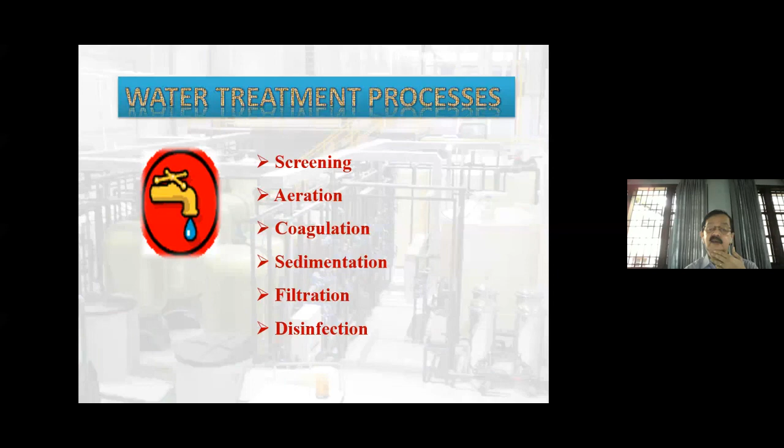Screening is nothing but using a screen with a small mesh size so that larger particles cannot pass through, simply screening turbid or impure water that has a lot of other particles. Aeration means passing air through the water, which purifies it by oxidizing many compounds, especially organic compounds, and iron.

Iron especially is removed by aeration, because dissolved iron is converted to the ferric form, which is not soluble in water and is precipitated. These things can be removed by aeration. It also promotes good bacteria growth, which helps purify the water.

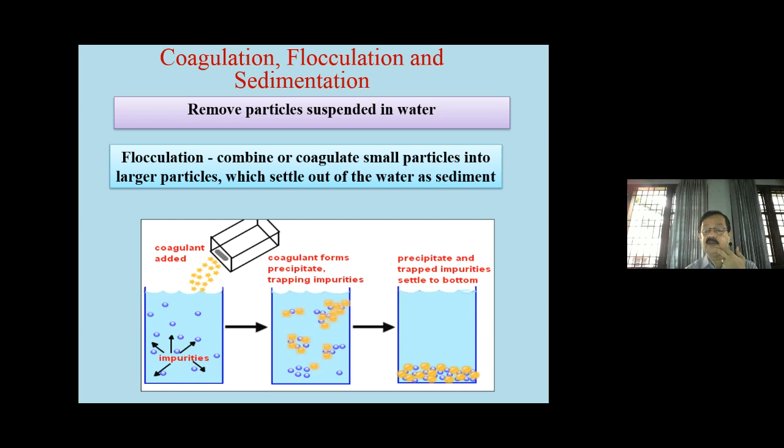Sedimentation, which includes the removal of particles by flocculation, lets us remove the sediment particles. There are so many instances where the water has a lot of impurities. Then we add certain coagulants, and that will trap the impurities; ultimately it will precipitate out, trapping the impurities, and settle to the bottom. That is what is happening.

If you put this powder in a vessel which has high turbidity, you can see that after some time the turbid particles will settle down. Then you can decant the water or filter the water through certain filter media, and then you can use the water. There are so many instances where people put this aluminum sulfate into a turbid water body, and after that sometimes the whole water gets cleared. So these are very good coagulants, and several industries are also using this type of flocculants.

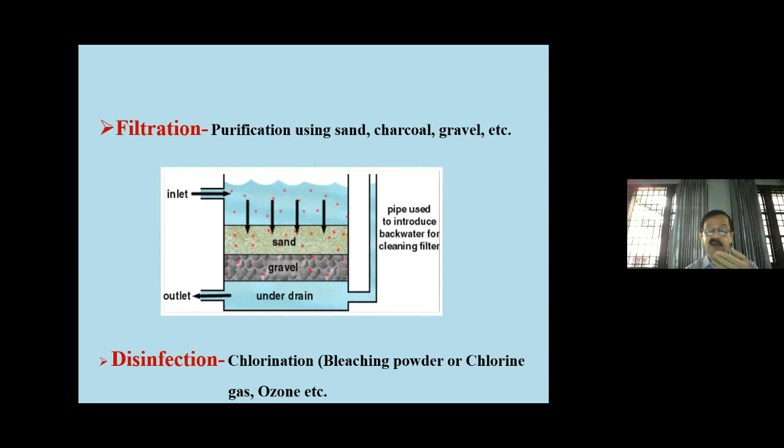Filtration is purification using sand, charcoal, gravel, etc. We pack these types of materials as a filter media, and if you pass the water through this type of filter media, ultimately the water gets purified. Coming to disinfection, I will come to that later. And this is a general treatment method which is practiced in a water treatment plant.

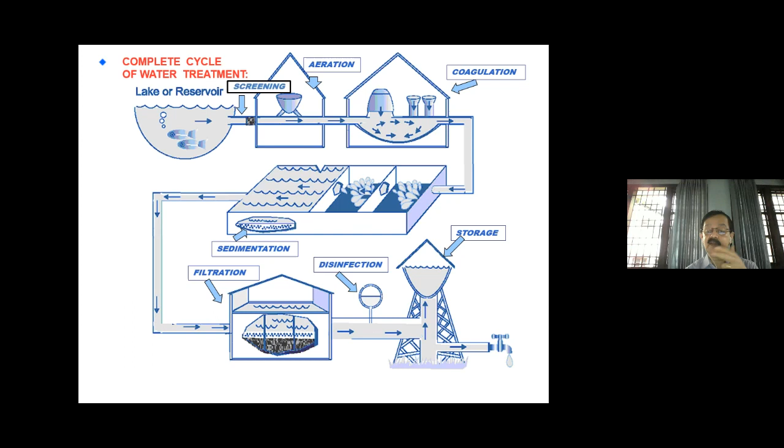and finally disinfection takes place using chlorine dioxide or chlorine gas, or even bleaching powder is added. Ultimately it will be treated, and we store it in some type of storage devices, and from there it is supplied to the public.

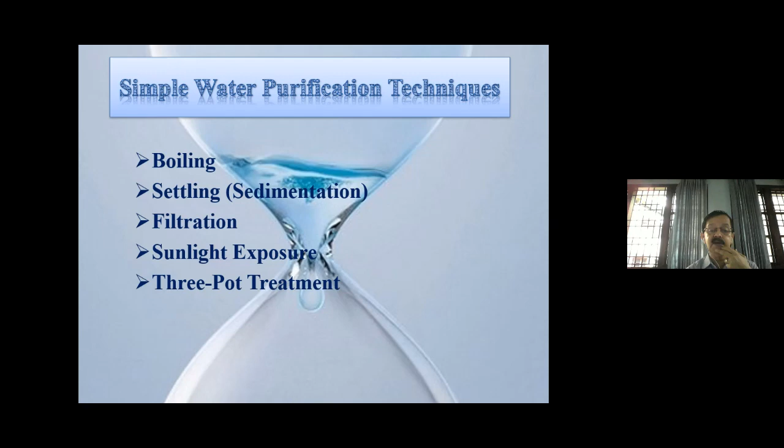There are so many simple water purification methods, like boiling, settling, filtration, sunlight exposure, and three-pot treatment. Boiling: if you found that your water is contaminated with E. coli bacteria or fecal coliforms, the best method is boiling the water for 5 to 10 minutes. It should be boiled a minimum of 5 minutes up to 10 minutes. That will kill almost all the microorganisms and harmful bacteria. That way you can purify the water and remove these types of pathogens from the microbial contamination.

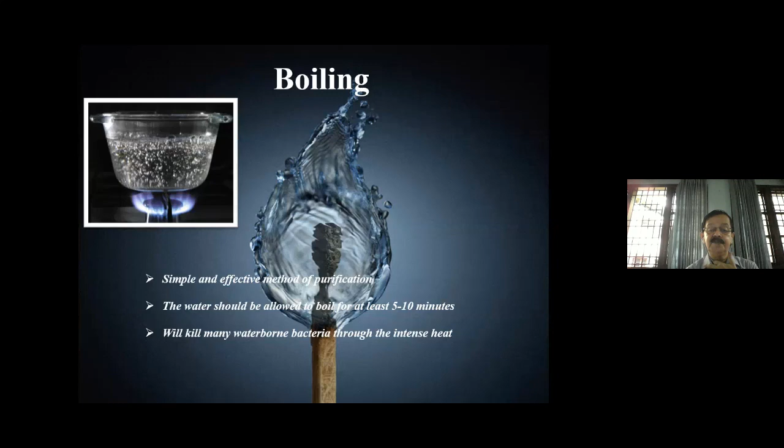Filtration is nothing but passing the water even through a clean cloth, that type of porous media. Ultimately it will be purified using this type of cloth. Settling, we already discussed: if you have a vessel and you add some turbid water, all the particles will settle down, and you can transfer that water into another vessel, so that you get some good pure water.

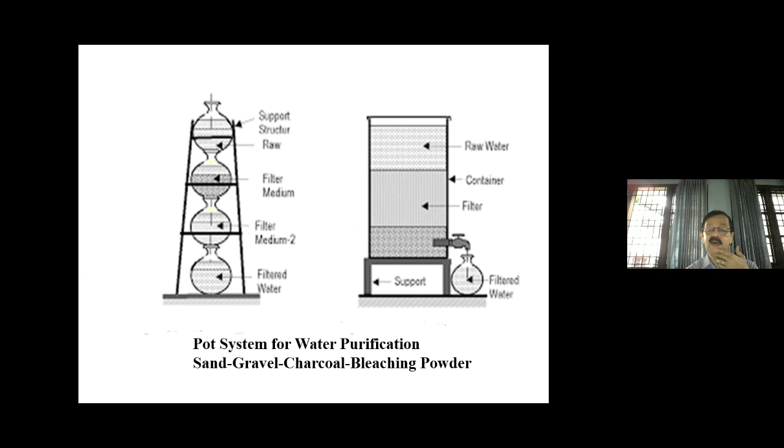These are some of the pot systems which you might have studied in your school classes also. There are supporting media, different types of media which we can use: sand, gravel, charcoal, bleaching powder. Still in so many villages, people are using this type of method to purify their water. So it's a relatively good method to purify the water where advanced technology is not available.

What happens is that it has to be pulverized, or we can take that particular pulverized media. Then it has to be added to the contaminated water. Then it acts as a coagulant, precipitating and trapping the impurities.

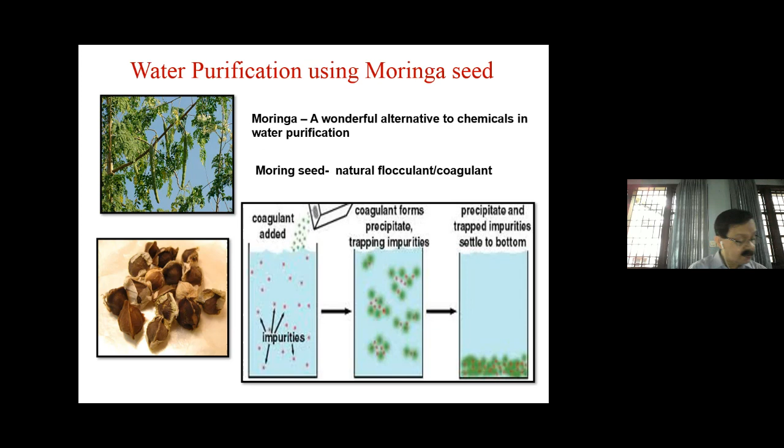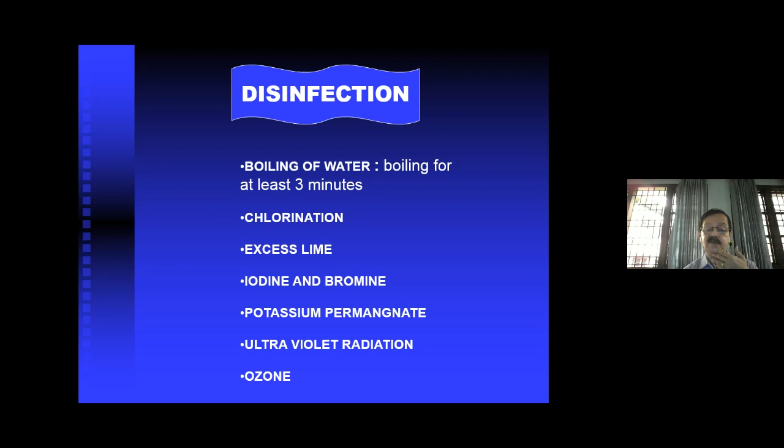Then we have some disinfection methods also, like boiling of water, chlorination, excess lime, iodine and bromine, potassium permanganate, ultraviolet radiation, ozone. All these are different types of disinfection methods which we are using to remove the pathogenic bacteria.

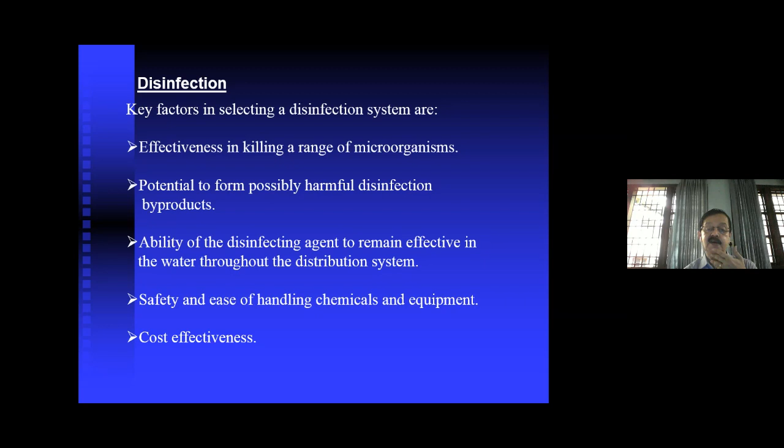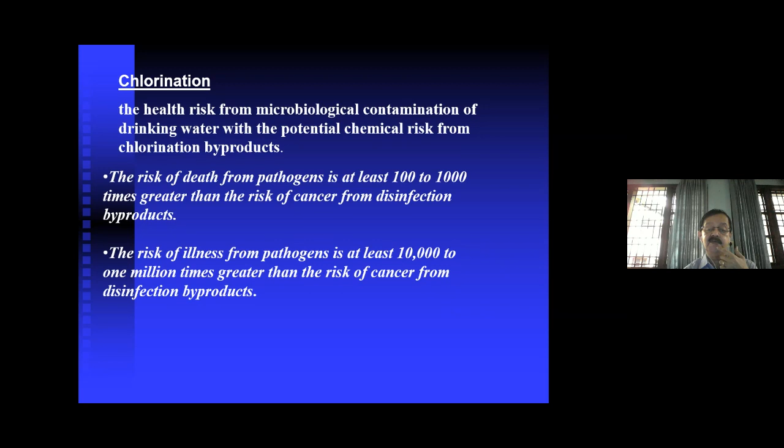Chlorination is one of the health risks reported in European and US countries. But we are still using it because we don't have the alternatives for removing the pathogenic bacteria. Then we have chloramines, when ammonia and chlorine are added in water together. This has the advantage of a very long lasting impact when you are adding chlorine with ammonia. So that's the advantage with chloramination.

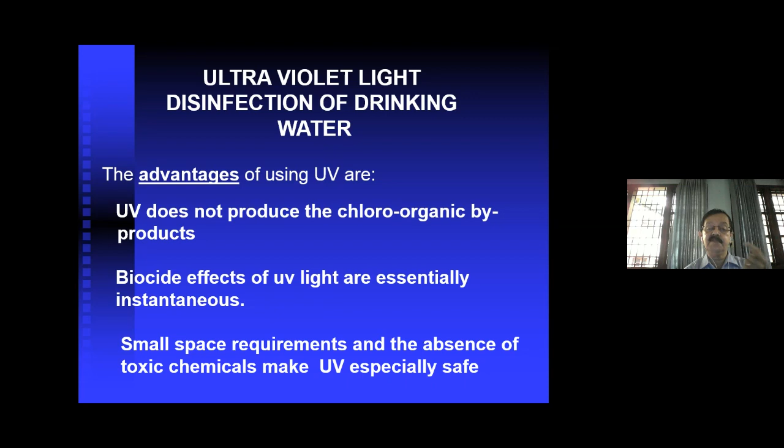Then ultraviolet disinfection. This is one of the best methods, where no side products are being formed. It does not produce chloroorganic byproducts. Biocide effects are instantaneous. A small space is required, and the absence of toxic chemicals makes UV one of the best methods. But the only thing is that the time period the impact will last is very less compared to chlorination. That's one of the disadvantages of ultraviolet disinfection.

Ozone also has the same effect, but it can also control taste and odor. Ozone is generally used in swimming pools, that type of water bodies, and it will prevent the formation of organohalogen compounds. It can also be used for the removal of iron and manganese.

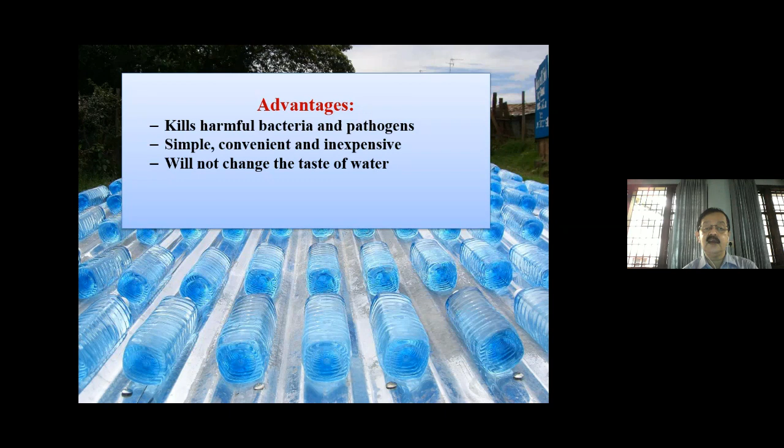Then again, SODIS technology. SODIS technology is nothing but keeping the bottles over the roof in sunlight, up to 5 to 6 hours, using this sunlight exposure. It has UV radiation, so the bacteria will be killed by this method. The advantage is that it can kill harmful bacteria, it is simple, convenient, and inexpensive, and it does not change the taste.

And again, chlorine. How we can use chlorine is that we have to use 2.5 grams of bleaching powder for 1000 liters, and this has to be formed as a slurry. Then you can add the required water. Then the clear solution needs to be added to whatever water body is there, like an open well. Then we can kill the bacteria. The water can be used 4 to 6 hours after this chlorination.

Then we can use a granulated activated carbon block. And as I already told you, UV and ozone can also be used.

Then defluoridation, that's a big problem in 15 endemic states in India. They generally use activated alumina to remove the fluoride. Reverse osmosis is another method by which you can remove fluoride. In Andhra Pradesh also there are many places with this fluoride problem, especially Nalgonda. I don't know whether it is presently under Telangana or Andhra. It's a famous place for fluoride issues. There they have developed a method based on the name itself, the Nalgonda technique, using alum as a media for removing fluoride.

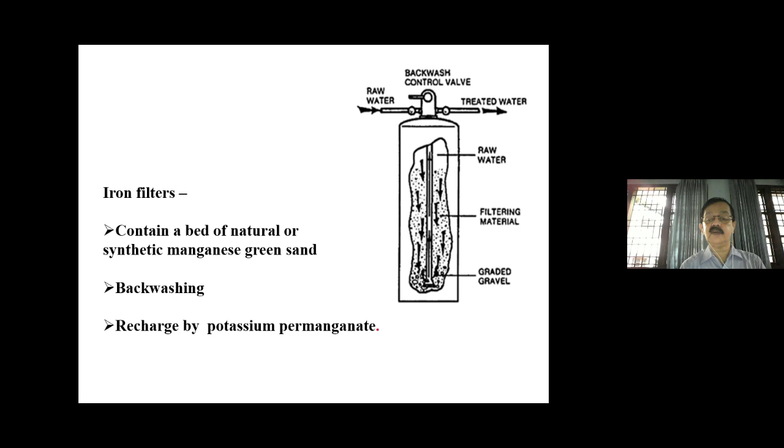Iron filters are also there, like using certain oxidized sand. We call it green sand. It is packed in a cylinder type thing. And if you are passing the iron contaminated water, ultimately your water will be getting purified. So this is the method by which we can remove the iron.

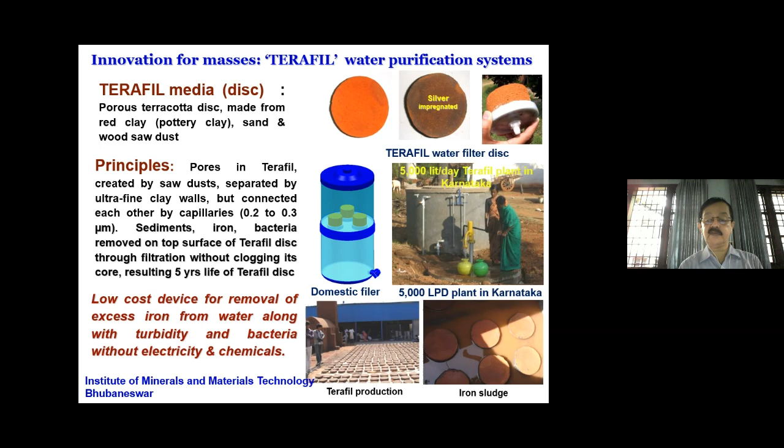Then again, there's a technology available with the Institute of Minerals and Materials, Bhubaneswar. They had developed a filter media called TERAFIL media, which contains red clay, sand, and wood sawdust. It very efficiently can remove the iron, which we also tested in our laboratory. So this can be a good alternative to treat iron contaminated water.

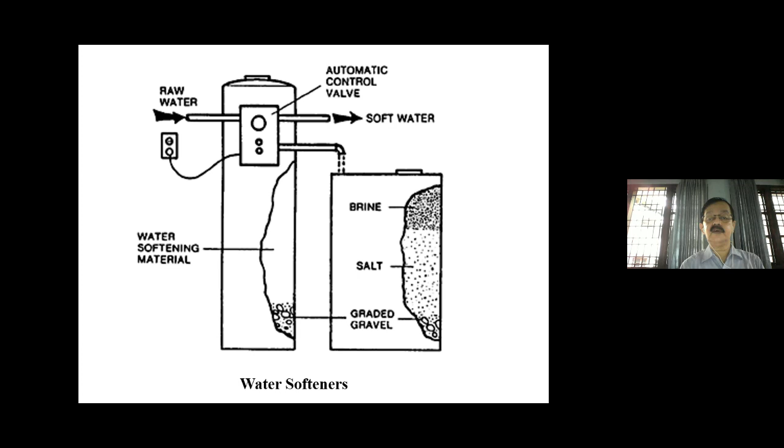Then water softeners are there, and that can also be used to control hard water if it is there. Summarizing, we have to improve the organoleptic properties using clarification, decoloration, deodorization. And again, ceramic activated carbon can be used. For removing the bacteria, we can use either boiling or disinfection. Then mineral composition can be improved by defluoridation, de-ironing, softening, desalination. So all these are some of the methods by which we can improve the water quality.

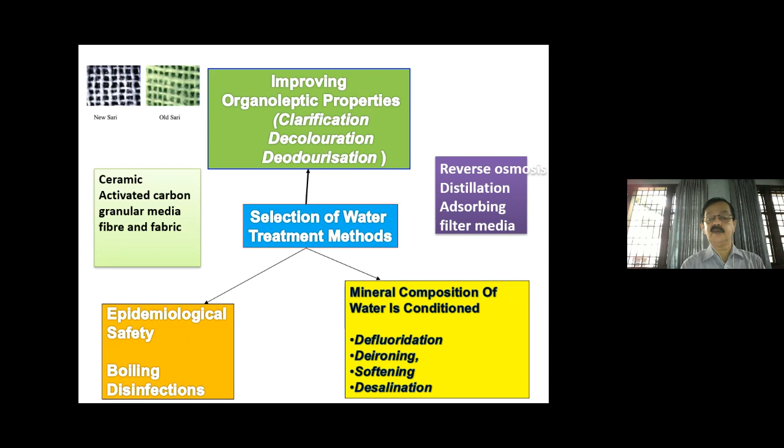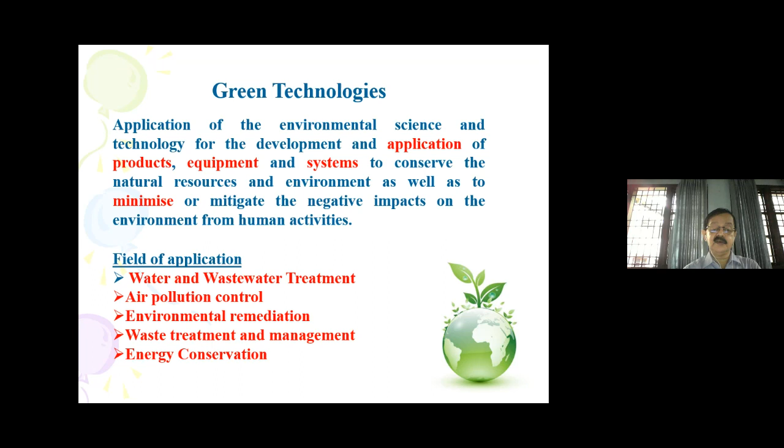In fact, there are so many technologies available, which include the advanced technologies, and you may also be studying some of these green technologies. The application is that we are conserving the natural resources with the minimum chemicals, to minimize or mitigate the negative impacts on the environment from human activities. The applications include water and wastewater treatment, air pollution control, environmental remediation, waste treatment and management, and energy conservation. So all these consist of these types of green technologies.

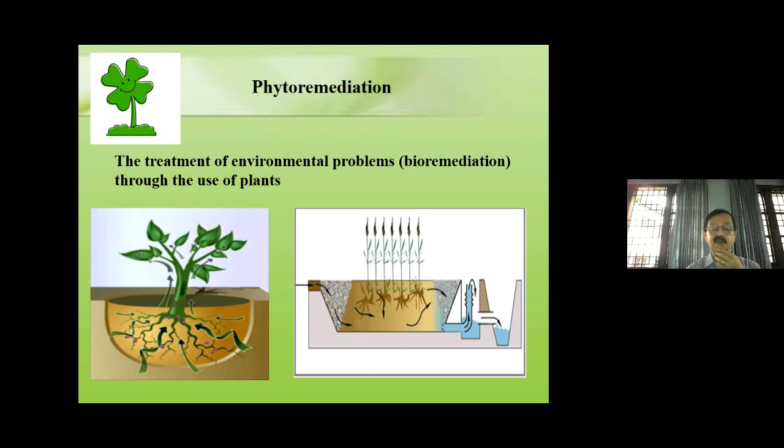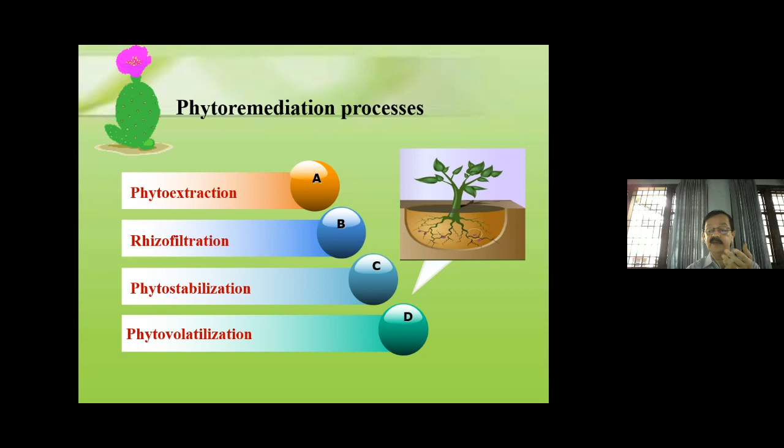Now coming to the plants which are being used for water treatment, there are so many technologies nowadays available, which we call bioremediation, to remove the contaminants or pollutants from contaminated soil or even polluted water. The plants help the removal of this contamination using phytoextraction, rhizofiltration, phytostabilization, phytovolatilization. So these are some of the methods by which the contaminants are removed.

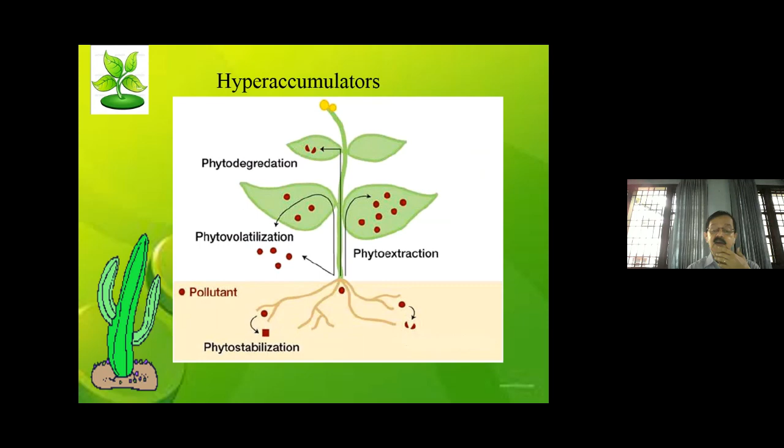Phytodegradation is where organic compounds will be degraded to harmless products. Then phytovolatilization is where the compounds will be volatilized. Then phytoextraction is from the soil itself; it will take out these toxic compounds and they will be deposited in the different parts of the plants. Then phytostabilization, the roots themselves will stabilize the compounds so that they will not spread into other areas.

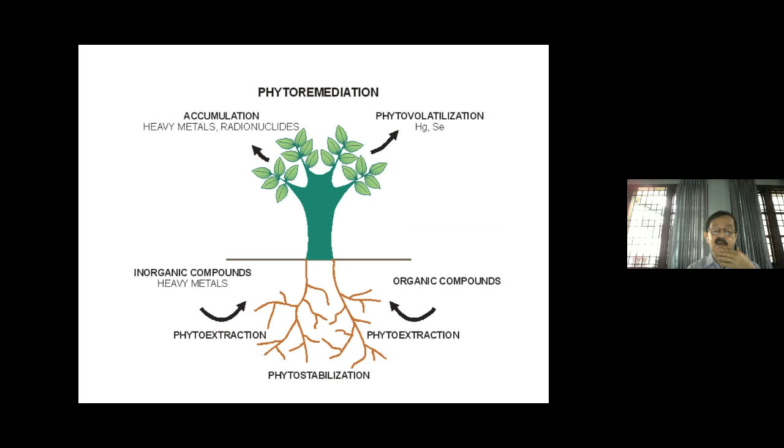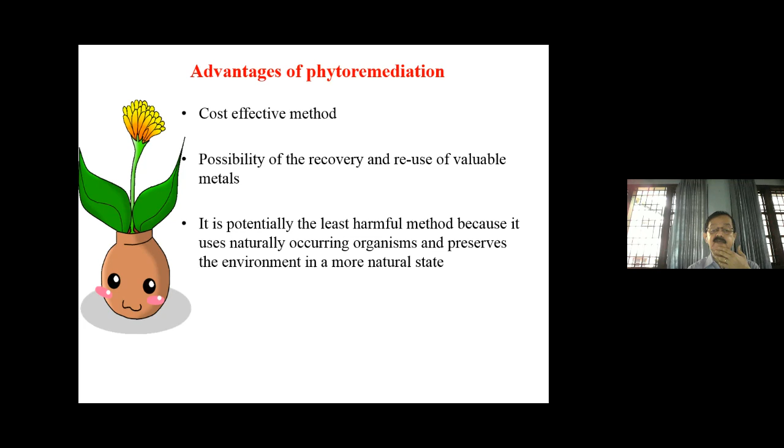So these are some examples: heavy metals and radionuclides can be removed by accumulation. Mercury and selenium can be removed by phytovolatilization. Inorganic compounds can be removed by phytoextraction. So these are some of the methods by which we can use phytoremediation, which is cost effective. The recovery and reuse of valuable metals is possible by this method. It is potentially the least harmful method because it uses naturally occurring organisms and preserves the environment in a more natural state. So we have used different plants for the removal of these types of contaminants.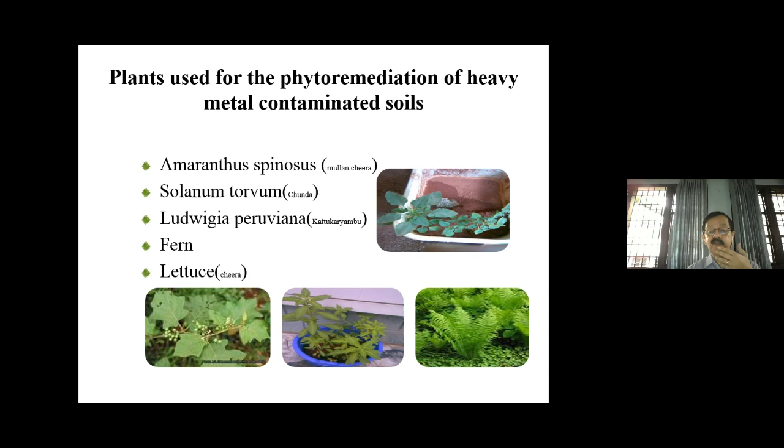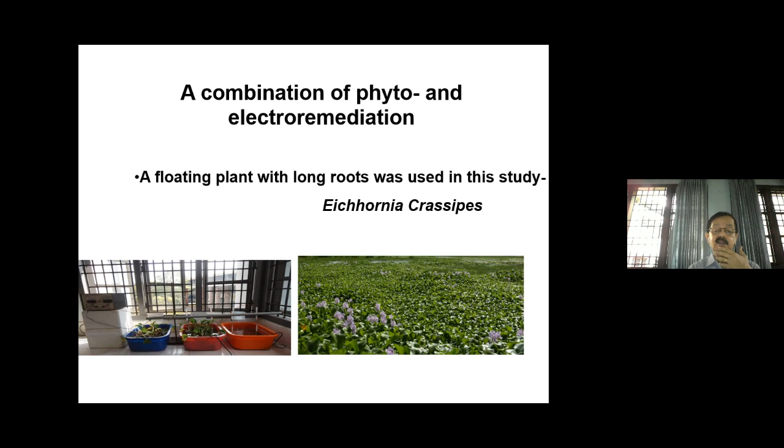You can even use the things which are available in your nearby areas. We have used another method also, where Eichhornia crassipes plants have been used. It's an aquatic species. We applied a certain electric current also. We found that the chlorophyll production increased and the system had a higher removal efficiency of certain compounds, especially heavy metals from the contaminated water, like cadmium and copper, which we tested.

Another novel feature of this type of technology is that green infrastructure is coming to many countries nowadays, providing ecosystem services for primary water management benefits. Many technologies and studies are being carried out worldwide regarding this. Green infrastructure can purify polluted water from both point and non-point sources by trapping sediments and pollutants, and it can protect groundwater from contamination. All this is possible using green infrastructure.

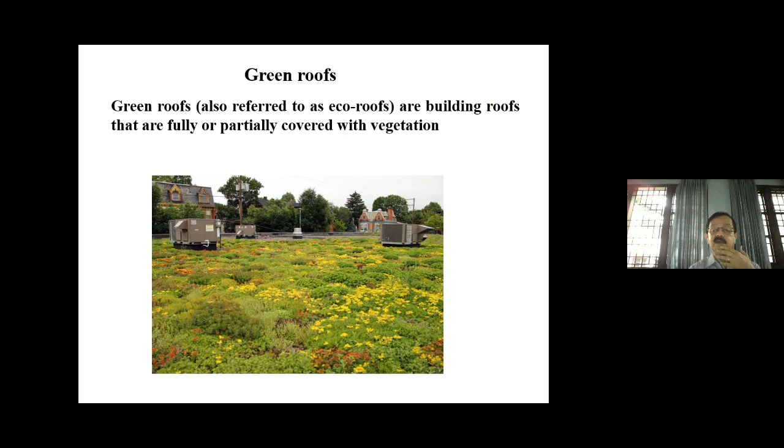Green roofs are also coming up, where over the building we can have green plantation that can be completely covered with vegetation. These can be intensive or extensive. Such green roofs can remove air pollutants including particulate matter, oxides of nitrogen, sulfur dioxide, carbon dioxide, ozone, and can also act as a storage for carbon. An example is a Chicago green roof where different types of plants are grown on the roof of the building, acting as green infrastructure. Such things are happening in many countries, so we can also adopt them.

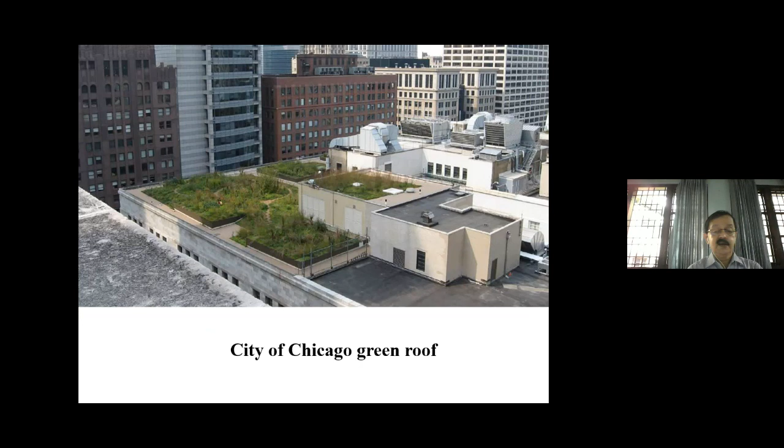Wetland restoration and conservation: wetlands can provide significant support to traditional infrastructure for water treatment, water supply, drought mitigation, and flood control. We call wetlands the kidneys of the environment. For example, the East Calcutta wetlands act as a kind of natural sewage treatment plant, where a large amount of sewage flows through the wetlands, gets treated, and finally flows into the water body.

Similar kinds of wetlands can be constructed, called constructed wetlands. There are two types: horizontal and vertical. Horizontal means the water flows horizontally, while in vertical it flows vertically. These are practiced all over the world, and in many places in India you can see this as well.

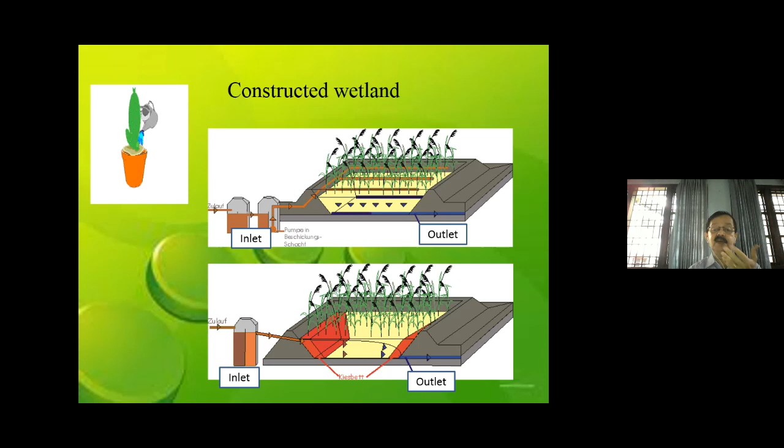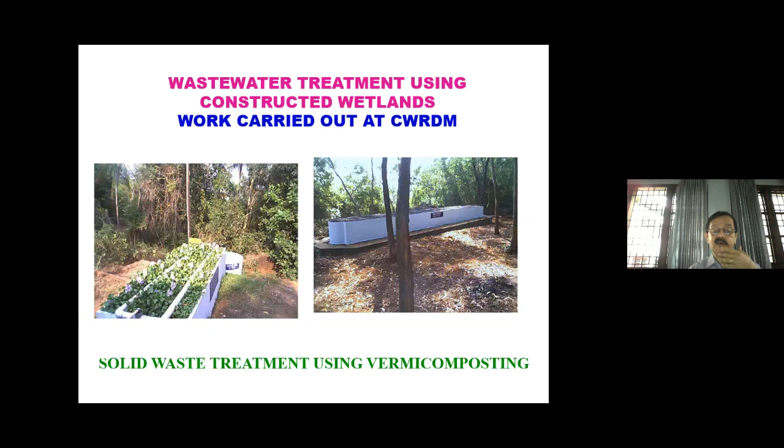We also did a study on how to treat or recycle the wastewater generated on our campus. Alongside this, we had a solid waste treatment unit where solid waste generated from the area is also treated. It has been operated for the last 5 years and was constructed using ferrocement. There are pre-treatment units like a settling tank, a skimming tank, and a filtration tank. The main treatment consists of a constructed wetland with filter media of sand and gravel, and many types of plants like phragmites and other locally available plants used for this recycling.

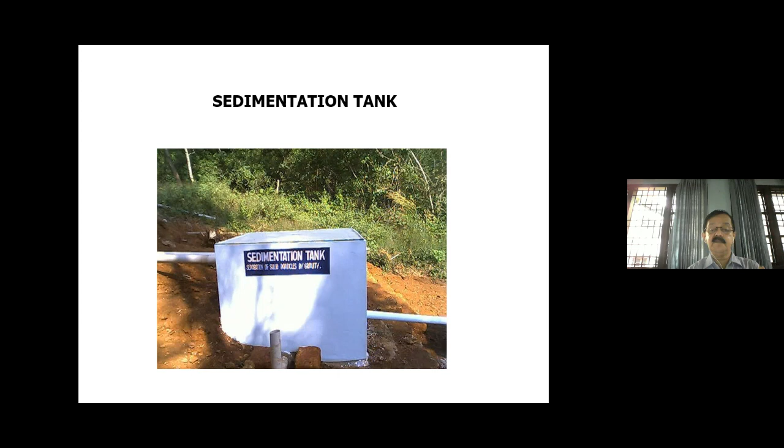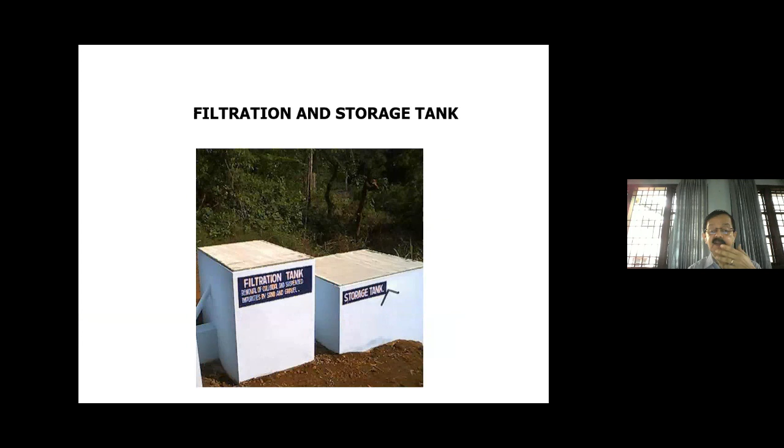Some stages of construction: the first tank is a sedimentation tank, where incoming wastewater undergoes sedimentation, and only clear water flows into the next skimming tank, where oil and grease are removed. Then filtration uses natural filter media, followed by a storage tank, from which wastewater is discharged into the treatment tank. That is the process of this constructed wetland, where different types of plants are grown.

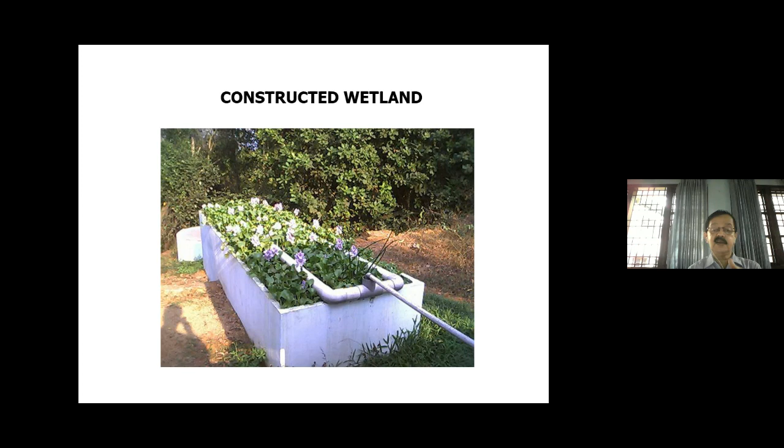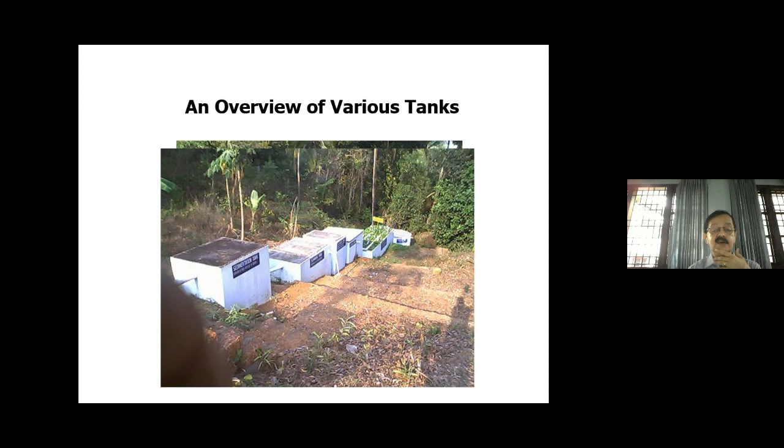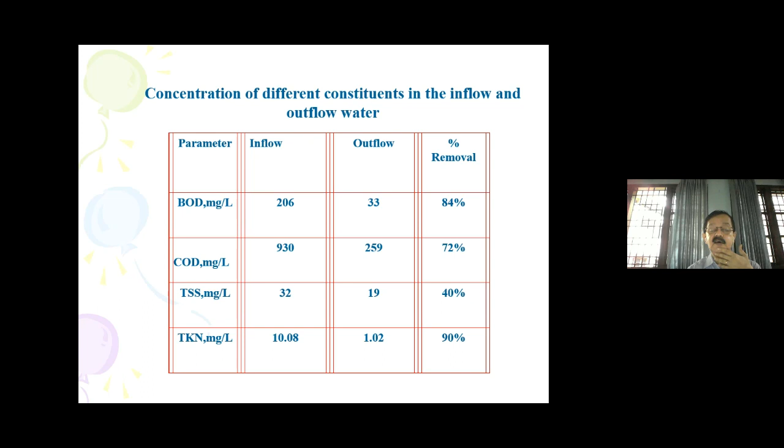The plants have to be harvested periodically so that we can recycle the water. The advantage of this system is that no energy is needed, since water flows into the final tank by gravity. Most parameters show a removal efficiency of around 80 to 90%, but a certain retention time, maybe up to 24 to 28 hours, is needed for maximum removal. These are some of the concentrations we experienced.

We also experimented with a vermicomposting unit, where we utilized African species to compost the solid waste generated in that particular unit, producing a good quantity of nitrogen and phosphorus, which we use as biomanure.

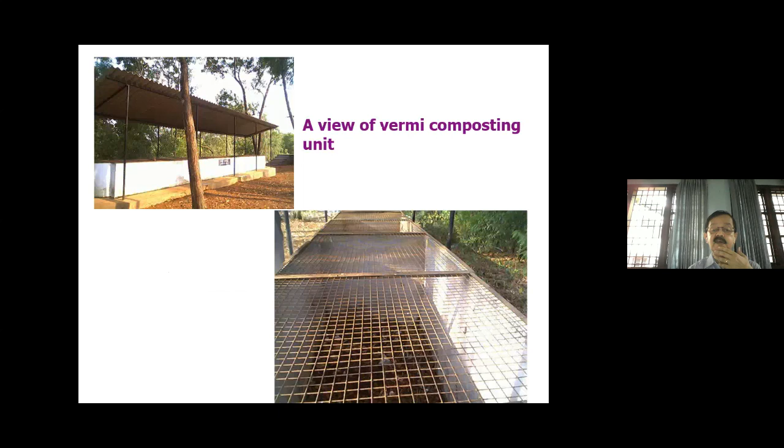So this is the vermicomposting unit which we actually fabricated in our campus. We also used a lot of other plant materials for removing fluoride, nitrate, or other types of contaminants, like a clove that we found efficient in removing fluoride.

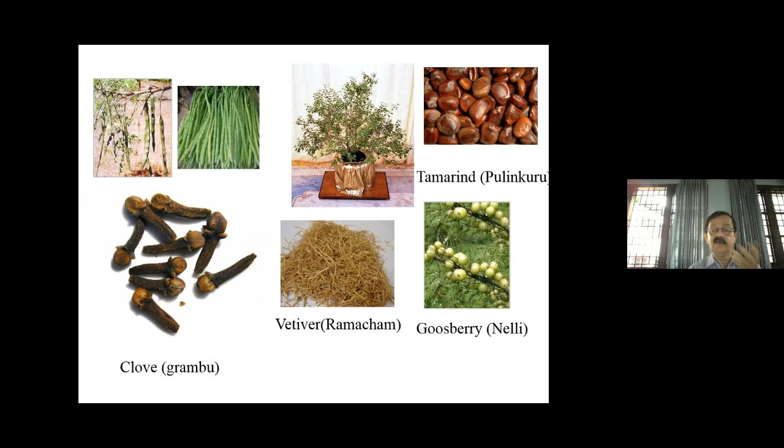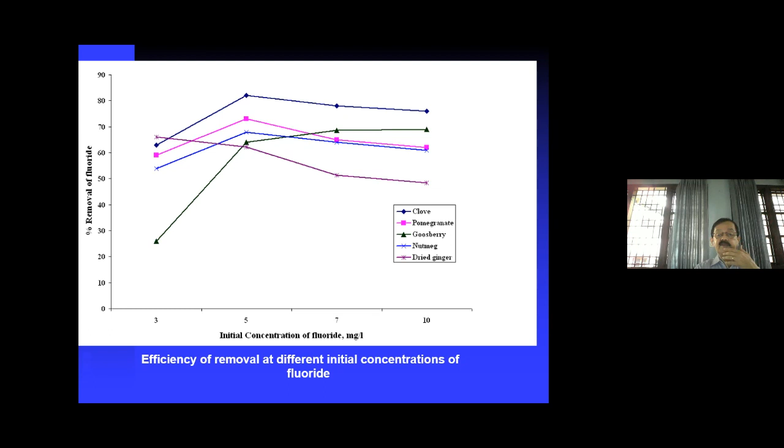Vetiver can actually remove certain metals. Gooseberry can remove certain nitrate. So all these plants have their own efficiency to remove certain fluoride or other contaminants. These are the efficiencies of different materials against different types of contaminants from polluted water.

We used some treatment units for testing the efficiency against these contaminants, and ultimately we developed certain filter media with these materials in our laboratory, used for removing contaminants present in water, especially fluoride and nitrate. We found that it takes place through adsorption and interparticle bridging.

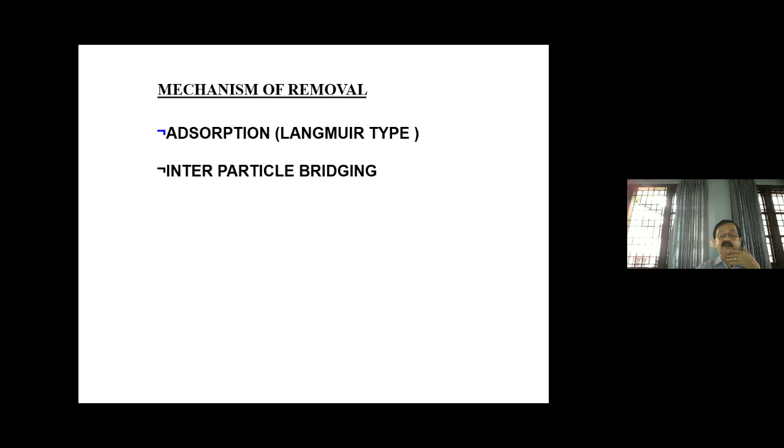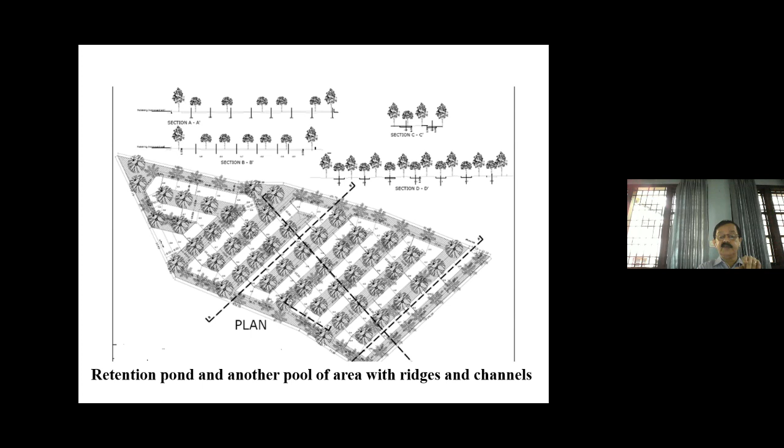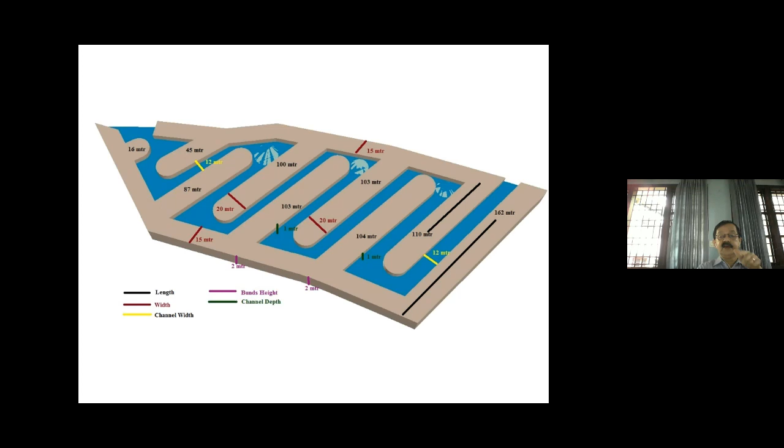Recently we did a study for an industry. We suggested a retention pond with ridges of different plant materials for passing that wastewater or polished water, so that finally it gets treated and can be reused or recycled in the campus itself. This is the mechanism we proposed, and they are actually constructing this type of biopark using terrestrial and aquatic plants.

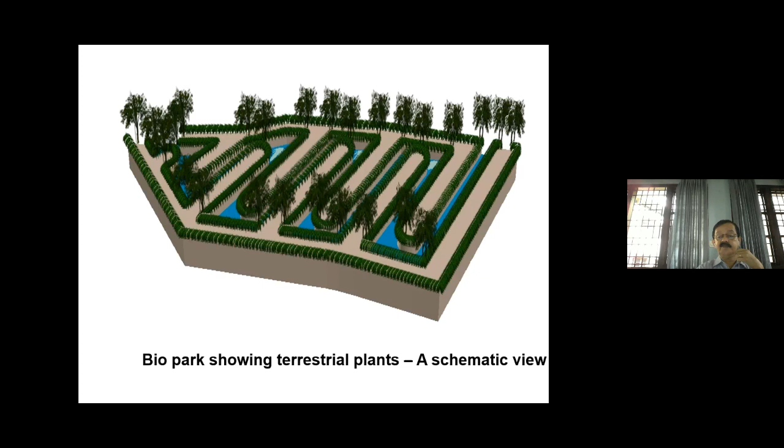These are the different types of plants which we used to plant along that particular area. This is a sketch of the wastewater flowing around that area, and along the sides we proposed a lot of plants, including aquatic plants. Ultimately that will be purified and you will get nearly 100% pure water which can be recycled and reused.

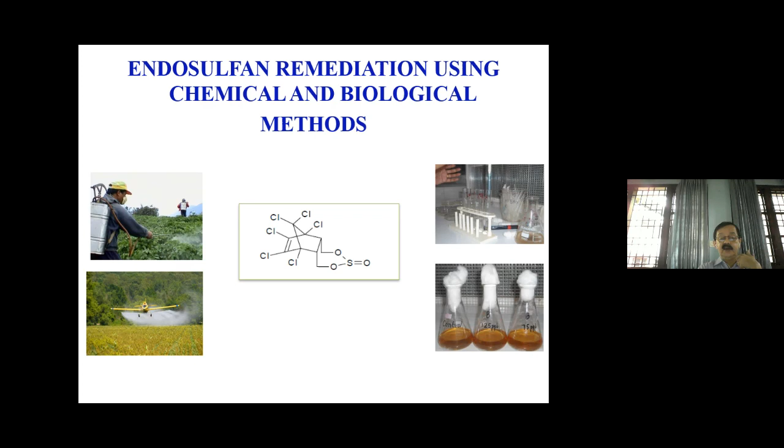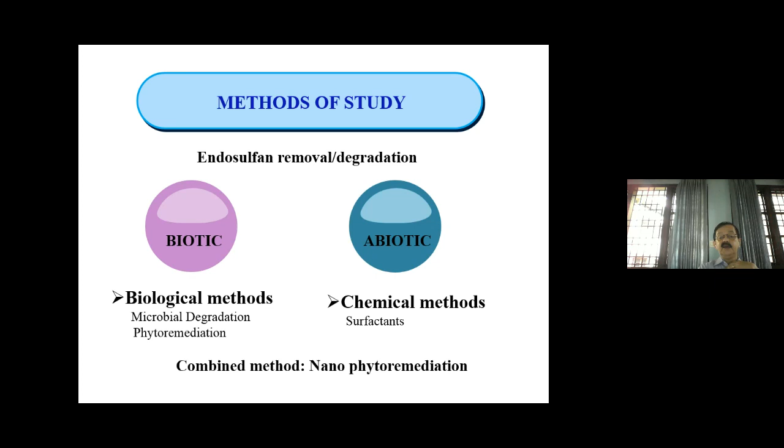We also used so many other methods for endosulfan, the pesticide which in Kerala we found to be very toxic, used in cashew plantations. We used biological methods, chemical methods, and nano-phytoremediation technologies have been used to degrade this endosulfan using plant materials.

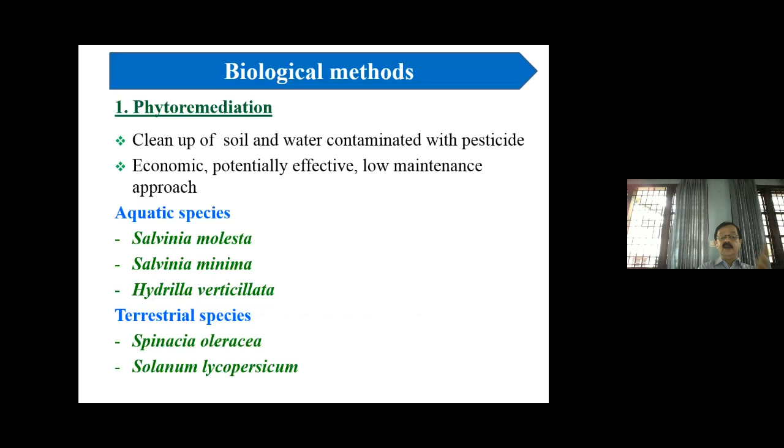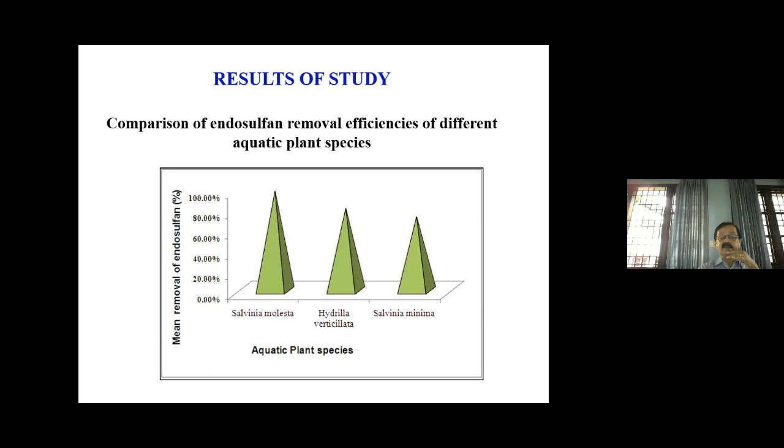Initially we used certain surfactants to wash away this endosulfan from the soil. Then we studied using certain plants, both aquatic and terrestrial species, how they can be used to degrade this endosulfan. We found that all these plant materials have the efficiency to remove or degrade the endosulfan, especially Salvinia molesta, which has very good efficiency.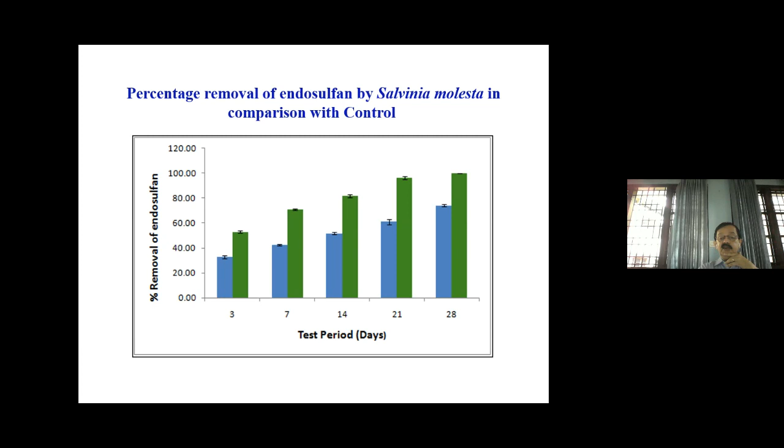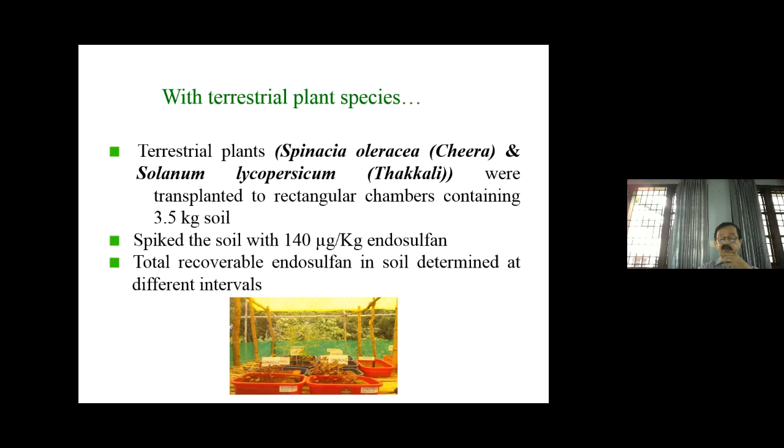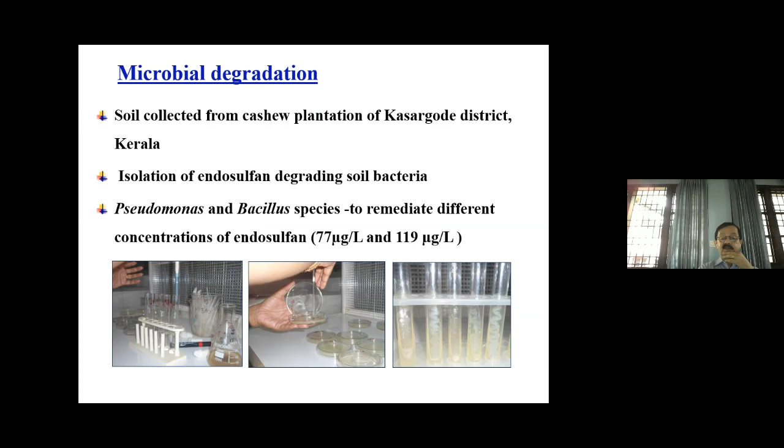After 28 days, it was found to completely degrade this type of endosulfan or some pesticides also. So we used other technologies too, not only plants. We used certain microbial media, like Pseudomonas and Bacillus, which were also found to be very efficient in degrading endosulfan from contaminated media, whether soil or water.

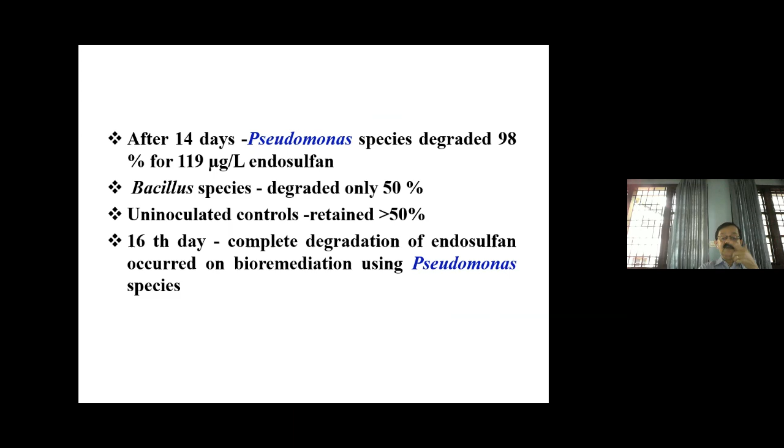We found that this Pseudomonas can actually degrade 98% of 119 microgram per liter endosulfan. So that is found to be one of the efficient methods to degrade this type of pesticide.

We also used nanotechnology, different types of nanocomposites, and mixed nanocomposites have been used to remove lead, cadmium, and nickel. Iron and silver-coated, doped zinc oxide nanocomposites have been used for degradation of dyes and textile effluents. Magnetic nanoparticles have been used as a potential nano-adsorbent, an effective media for removing these types of contaminants.

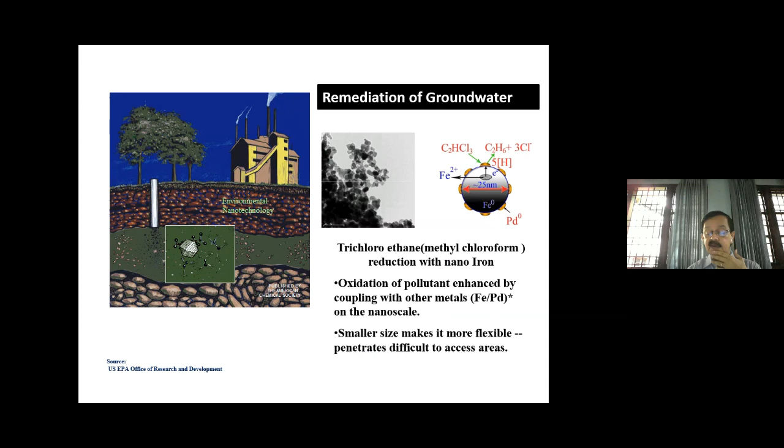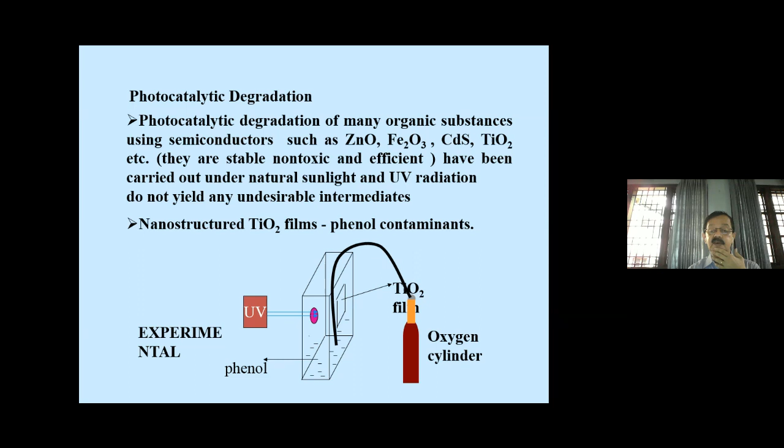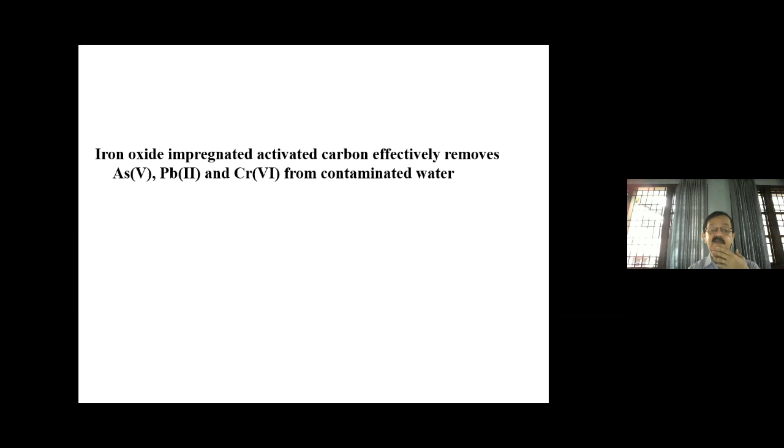Remediation of groundwater is also being attempted using zero-valent iron nanoparticles. Photocatalytic degradation is also being done using titanium oxide films, studied in our laboratory for degradation of certain organic compounds. Toxic heavy metal removal using zero-valent iron nanoparticles has also been attempted, and iron oxide impregnated activated carbon is found to remove toxic metals like arsenic, lead, and chromium from contaminated water.

We have also started some microbial synthesis of silver nanoparticles for application in water treatment. And regarding water treatment in general, you should have pre-treatment, primary treatment, secondary treatment, and tertiary or advanced treatment, as you may already know.

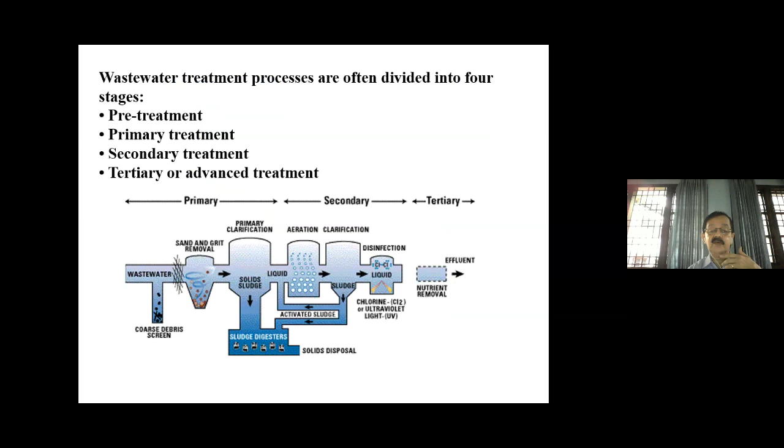There are so many processes involved in advanced treatment. Even municipal water treatment systems require these types of things, then secondary sedimentation activities like trickling filters. So these are some of the technologies which you may need in wastewater treatment.

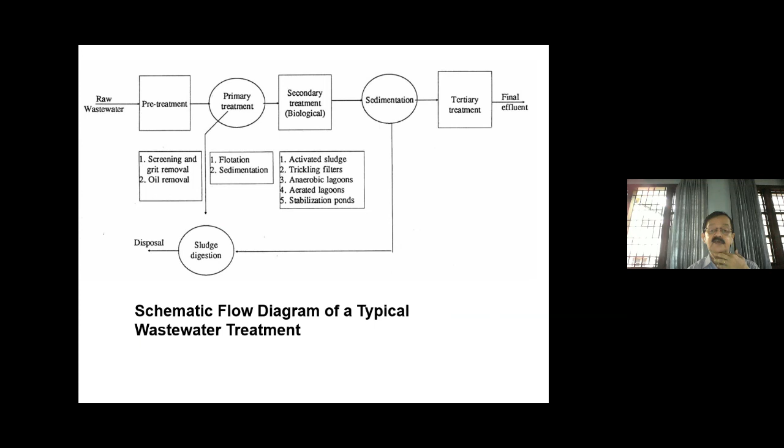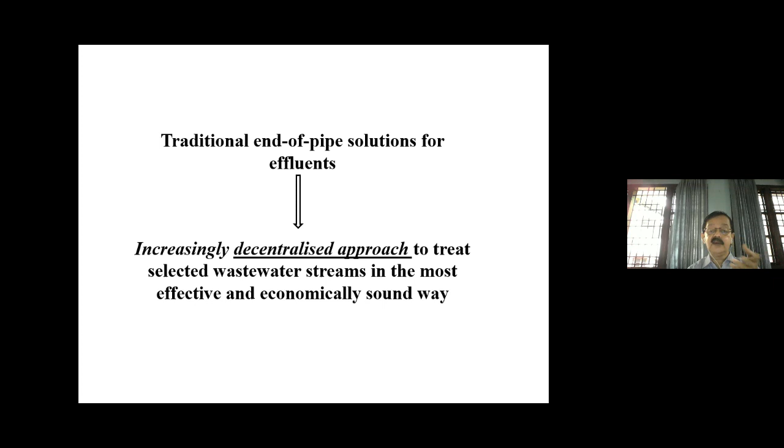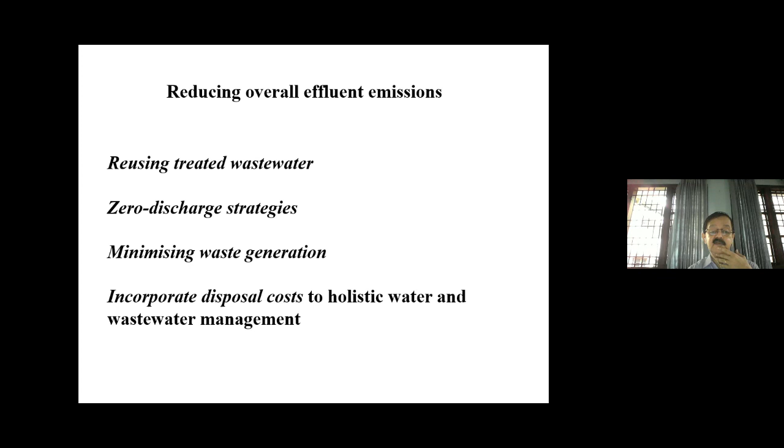Traditionally, and nowadays we are approaching a technology where we focus more on a decentralized approach to treat selected wastewater streams rather than integrated systems. We should have a decentralized approach, which is being practiced world over. The advantage is reusing the treated wastewater in zero discharge strategies, minimizing waste generation, and incorporating disposal cost into holistic water and wastewater management.

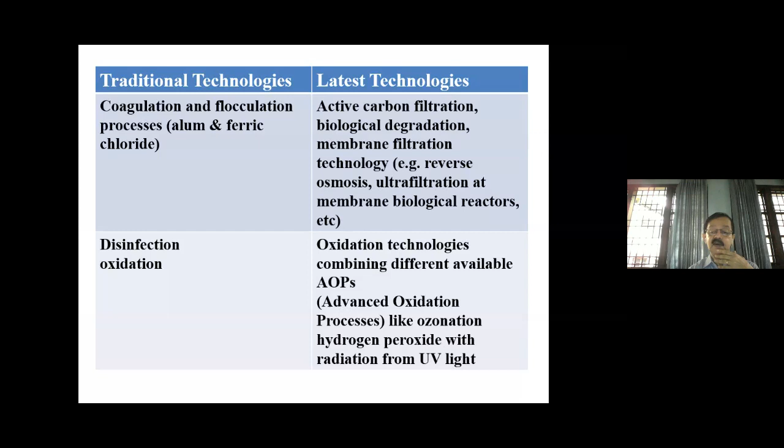There are traditional technologies like coagulation and flocculation. These have been replaced by latest technologies using activated carbon filtration, biological degradation, membrane filtration technology. Then disinfection or oxidation technologies, advanced oxidation processes like ozonation, hydrogen peroxide, with radiation from ultraviolet light. Activated sludge bioreactor is now being replaced by modular design approach.

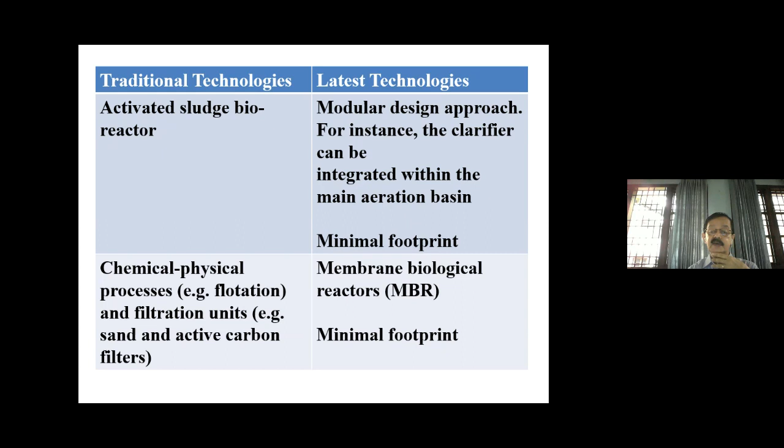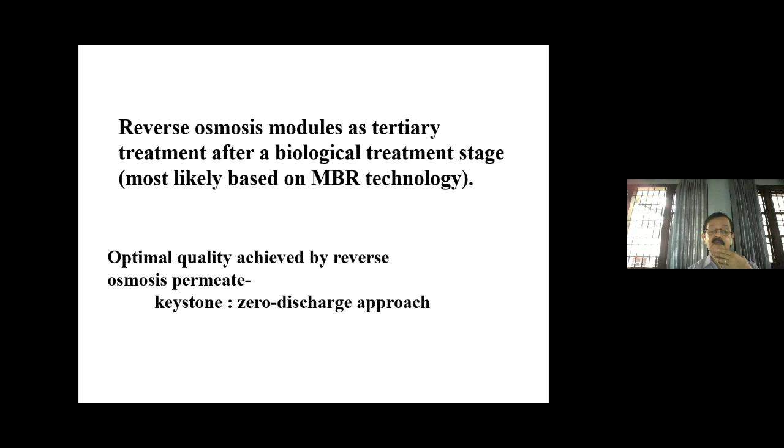For instance, a clarifier can be integrated within the main aeration basin, which results in minimal footprint. Chemical physical processes are being replaced by membrane biological reactors that also result in minimal footprint. Then reverse osmosis as a tertiary treatment after a biological treatment stage, achieving optimal quality through reverse osmosis permeate under a zero discharge approach. So this is something which I wanted to share with you.

Excuse me, sir. Yes, yes, please. Your PPT is not visible.

Actually, I had concluded my presentation. So if any doubt is there, I think we can raise any questions regarding what I presented.

Yes sir, there are some questions. Maybe I can read these questions and then you can answer one by one. So we are getting several questions. The first question is, what are the coagulants in purification of water?

The main coagulant is aluminum sulfate, which we use, called alum. It is one of the best coagulants generally used. And even in industrial water they use iron sulfate, iron chloride also, those types of coagulants are also used. Even polyacrylamide is also used for this type of coagulant in several industrial units.